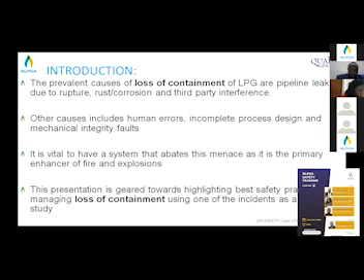Okay, so basically, the main causes of loss of containment of LPG are leaks in pipes and vessels due to rupture, corrosion or rust, and third-party interference. Also, human errors, faulty engineering designs, and mechanical integrity faults can lead to loss of containment of LPG. It's also important to avoid loss of containment of LPG because this is actually the main cause of fire and explosions.

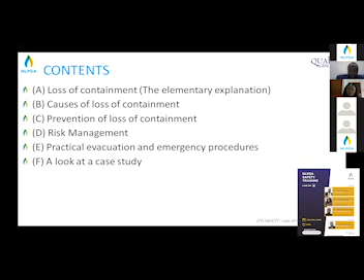So the contents of this presentation are loss of containment, causes of loss of containment, prevention of loss of containment, risk management, practical evacuation, and emergency procedures. And then we'll be looking at a case study using a real life scenario. So the pictures here clearly show what loss of containment is.

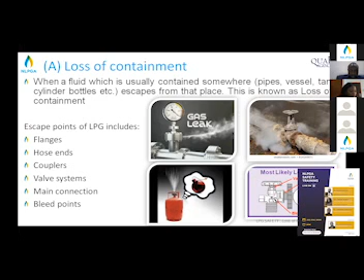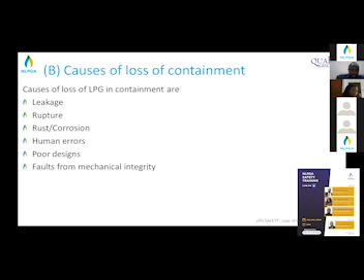The escape points are mainly joints and connections, which can be found in areas like flanges, hose ends, couplers, valve systems, main connection, and bleed points. So once again, the causes of loss of containment are leakage, rupture, rust and corrosion, human errors, poor designs, and faults from mechanical integrity. So the first here is leakage, and the pictures here clearly show what leakage is.

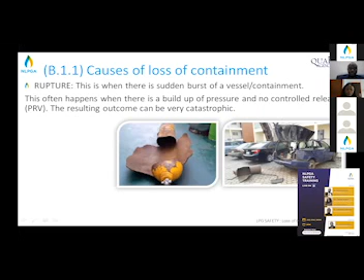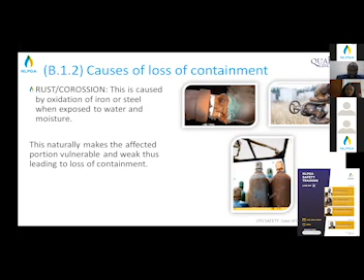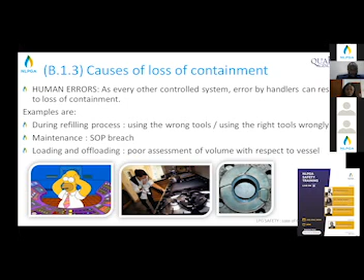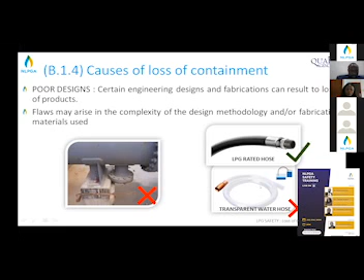As you see in the first picture here, you can see that. Also, not using the right materials for fabrication, as seen here also, can lead to loss of containment. Using... I mean, any of the above.

So as a... Sure, yes, please. Seems to be audio fluctuation taking place. Okay, you can't hear me clearly. What about now? Okay, it's clear now. Go on, please proceed. Okay, so I'll start again from this slide.

Preventing leakage domestically. For storage, for sale or...

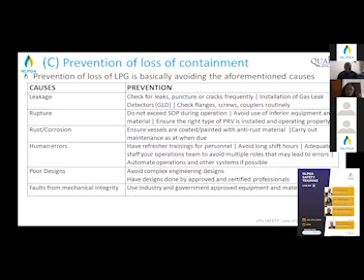Then lastly, always demand all necessary approved standard certificates for all equipment and accessories before purchase. Then here you have the fire triangle. I mean, for fire to occur, you need oxygen, you need fuel, and then you need heat. In a gas facility, there's oxygen around you because you breathe in oxygen. And because it's a gas facility, there's fuel present.

So what you want to do to manage risk is to ensure that the source of spark is prevented. So you want to ensure that your facility is free of electrical, friction, and impact sparks. You also want to make sure self-heating equipment is put far away. And then static electricity is also prevented by earthing your tanks and trucks properly. And also installing a lightning arrestor at the facility helps.

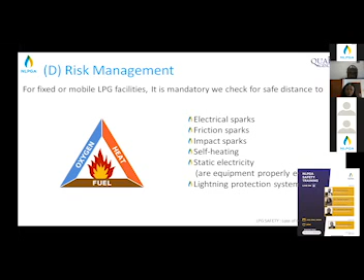Then going further, you want to make sure that there's a safe distance between your LPG facility and flames and direct heat, hot work, incandescent materials, and hot surfaces. Well, in the event hot work needs to be done, ensure a hot work clearance certificate is gotten as part of the SOP.

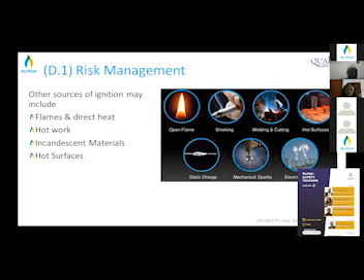For practical evacuation, you want to ensure there is a clearly labeled muster point. If there is none, ensure one is created. Any chosen point has to be safe and can be reached quickly, especially from hazardous areas of the facility. Also, evacuation from the chosen point should be very easy.

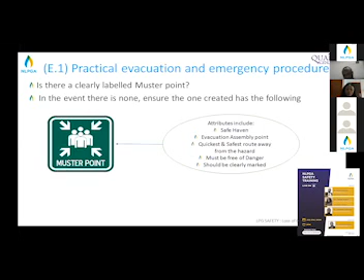For emergency procedures, you want to ensure your procedures are updated when needed. Also, have a fire escape plan designed specifically for that facility. You need to carry out fire drills constantly and ensure all personnel are trained on what to do during a real life emergency situation.

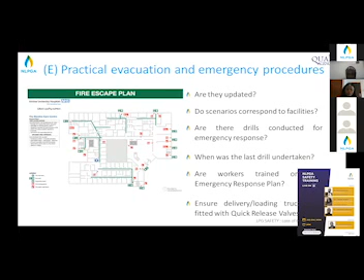Then also during loading and discharge at facilities, you want to ensure tanks and all trucks are fitted with QRVs. That's your quick release valves. So this ensures there's no escape of gas when the truck needs to do a quick getaway from a situation.

So here we have a video of a real life scenario used as a case study. And this shows what can be prevented if all we have mentioned during this presentation is followed. It is actually an LPG truck involved in an accident that went up in flames, but did not explode, even with the buildup of pressure in the tank, because the PRV did its job. That's your pressure relief valve.

Also, you want to note at the end of the video that the LPG truck itself was still intact as compared to the petrol truck that was behind it. So let's go straight to the video now. You can see the truck there and the fire burning on top of the tank of the truck. So that's the PRV. You can hear the sound of the gas coming out at a controlled rate. That's the PRV actually doing its job perfectly well there.

And then here you can see the tank itself after the fire had been doused. You can see the tank is still almost intact. Even the rubber tires are still almost intact there. That's just because the PRV did its job well.

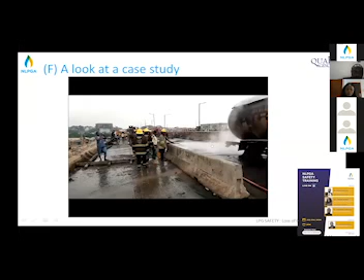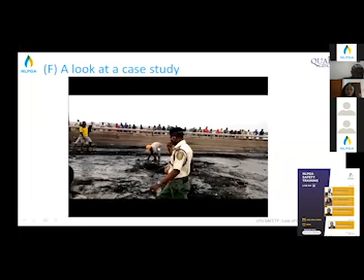So what this video is saying is that you want to make sure all your equipment and accessories used in your LPG facilities or domestically are working properly, they are installed properly, and of course they've met all safety standards by government bodies, the regulating bodies. So you're still going to see the petrol tanker now. So that's the petrol tanker there, completely burnt. So safety is very key.